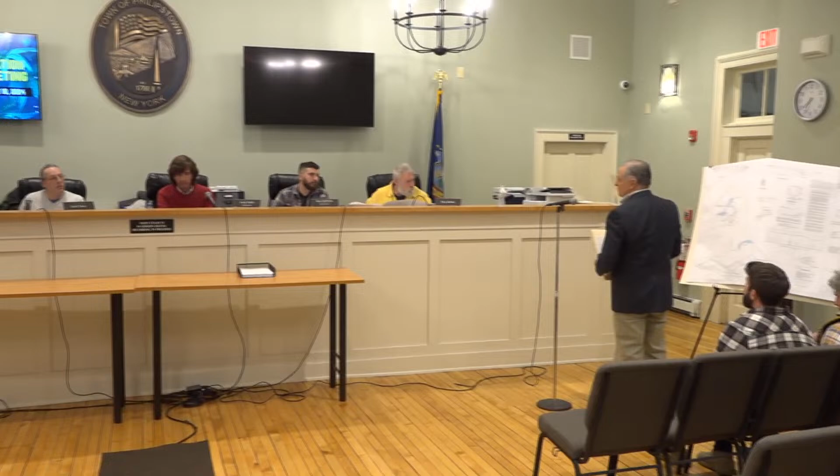Based upon the inspection made over the weekend with the board, we've prepared a revised plan for the board to review. We took the comments of the Conservation Board and made some environmental changes that we felt would ensure the preservation of the wetlands on the property and help preserve the character of the drainage channel.

So some of the changes made based on the board's input: we replaced a culvert pipe with a bottomless culvert, so that we're leaving the drainage channel intact and simply spanning over it. It's similar to a bridge, or an arch culvert without a bottom.

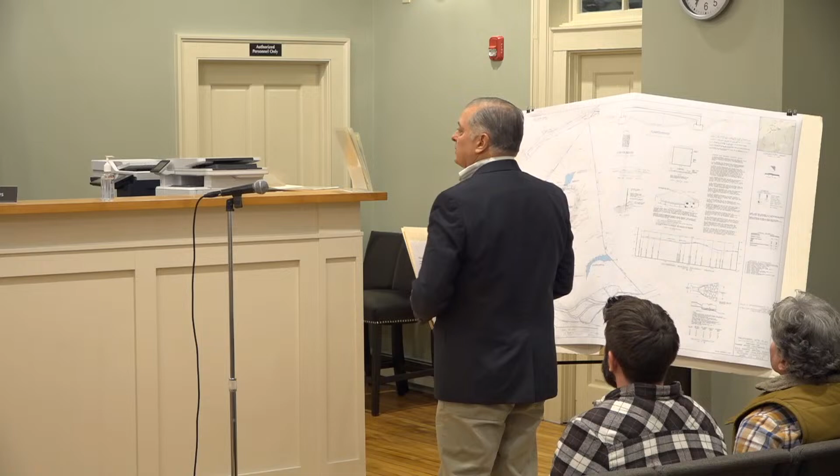In addition, we've incorporated stormwater management along the driveway. The intent is to intercept any runoff from the driveway prior to it flowing into the wetland, allowing it to filtrate into the ground. The proposed driveway will be a pervious gravel driveway, which will allow the stormwater to filtrate into the ground as opposed to shedding off the site. We believe those were the major concerns of the board based on our inspection.

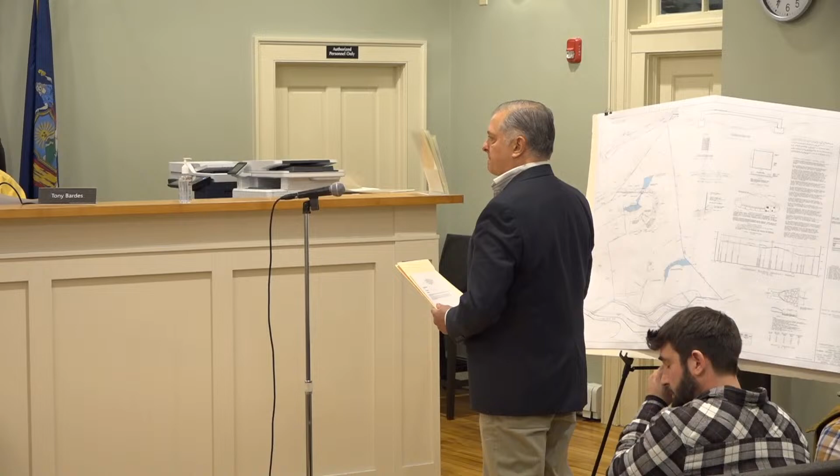So what you're using for drainage is basically a trench, a swale. We consider it an infiltration trench, and it allows the stormwater runoff to filtrate into the trench as opposed to flowing over land. Right, so my only comment on that - I'm not against it.

I've tried the same thing on my driveway, which is a half mile long, more for drainage purposes. The homeowners are going to realize the maintenance can be significant, because when you're plowing a dirt road, some of the material goes where the trench was. I'm not against it - I wish we had it on many of our unpaved roads in the town. If there's the wherewithal to take care of it, it definitely works.

Does anyone have questions or comments on this? How did you establish the width of the crossing? Just the span - based upon visual observation of the drainage channel, it appeared to be somewhere in the range of 6 to 8 feet at that point, so we increased it to 10 feet in order to ensure there's no impact on the water path.

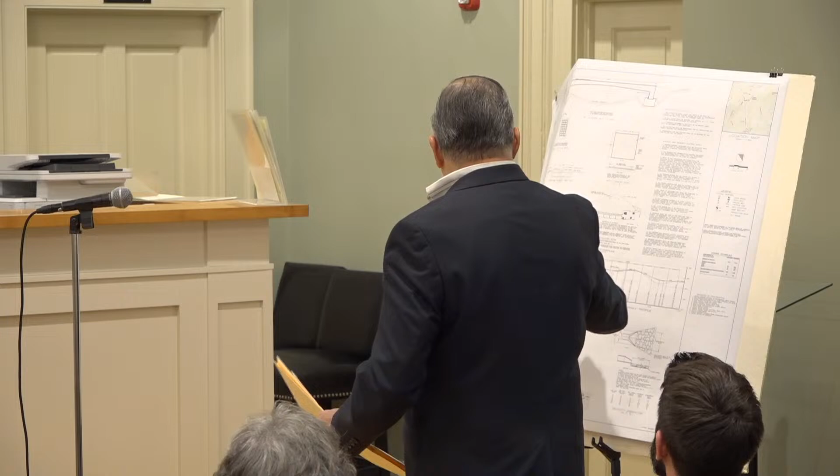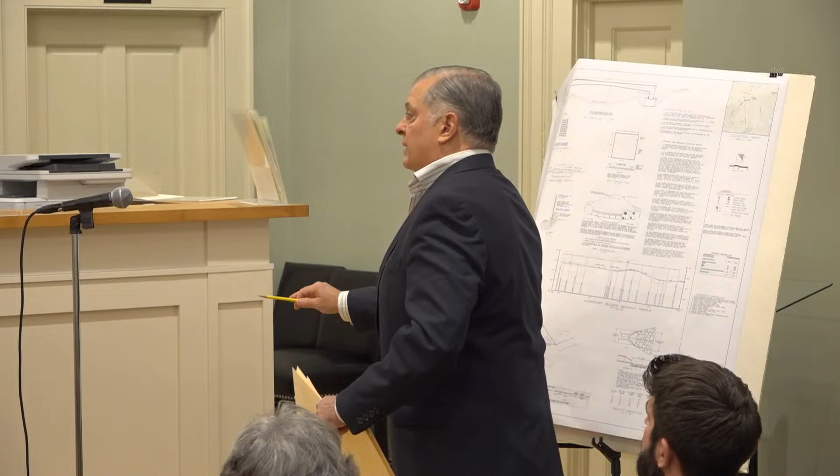So when you come off of Pine Ridge, there's a few feet of drop that would be graded to the level of the existing road. It comes back down to grade, and we're following the natural grade for most of the path.

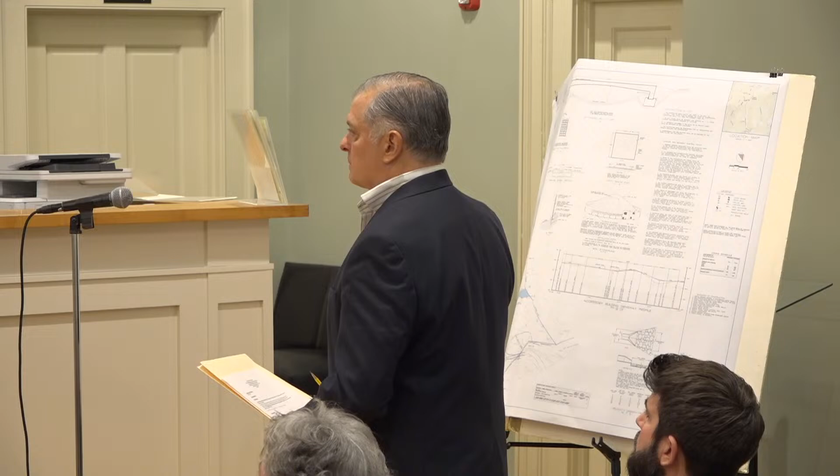I totally understand that. Where there's going to be some cut and fill is not in the to and fro, it's side to side. Because while you're on a gentle slope, the slope in spots is probably exceeding 5%, which just needs to be built up.

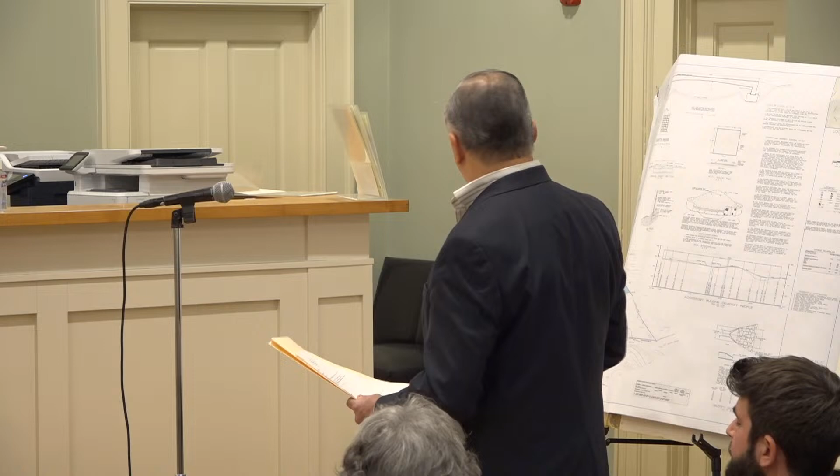So there may be some minor grading, but from my observation, we are able to create the proposed driveway with minimum disturbance to the existing trees, minimum disturbance to the existing grade, and it appears to be an ideal location for a driveway. But I do appreciate the input regarding the consideration of the drive.

We have other comments, questions? Yeah, I have one.

I was not able to make the site visit, and I was wondering if anyone would care to comment on the wetland area, the water body, and its health. I think at best it's an intermittent water course. It was dry. Well, everything's dry right now. I think it'd be hard to even classify what type of wetland it is, just based on the characteristics of the site right now.

So probably when it's really wet out and there's heavy rain, you're going to have water flowing through there, and the soil is probably pretty hydric, so it might pool in areas. But it's not a swamp or anything by any means, like a red maple swamp forest.

Well, the blue area looks confusing because it looks like a lake. Yeah, that's actually on a hill, a slope. It's not a lake.

I think using the floodplain, and using a wide span, as wide as possible, is a very good measure. We'll look into that. Protecting the bed and banks of the stream would be essential there, and working outside of that.

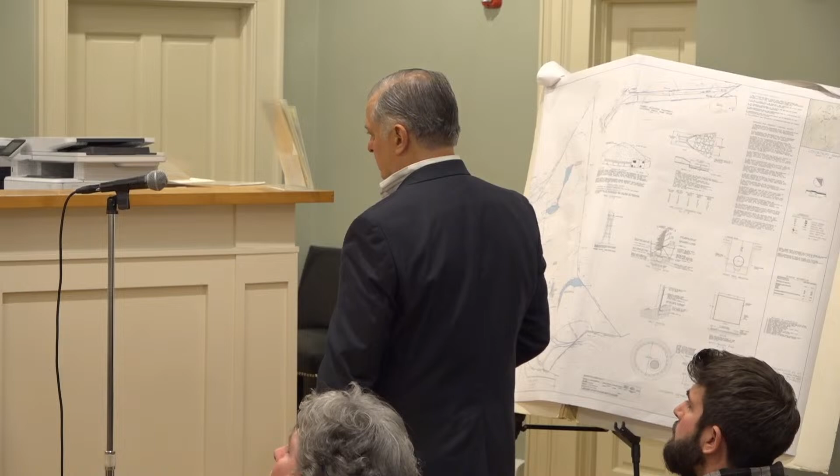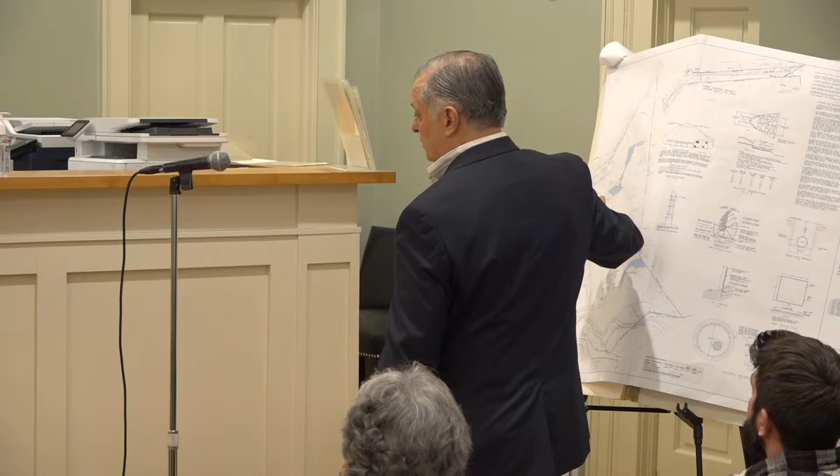That becomes an interesting one because they sort of overlap, the trench line. You're not going to dig the trench, I'm assuming, until you do the upper section. So I think the trench line, even though it's feeding the lower house, which we'll call Permit A, we'll probably have to permit with Permit B. We would need to be able to include the sanitary system for the existing house and allow that construction to take place if we were going to get a permit for the existing house. As far as the accessory, everything regarding the accessory could be left under that permit.

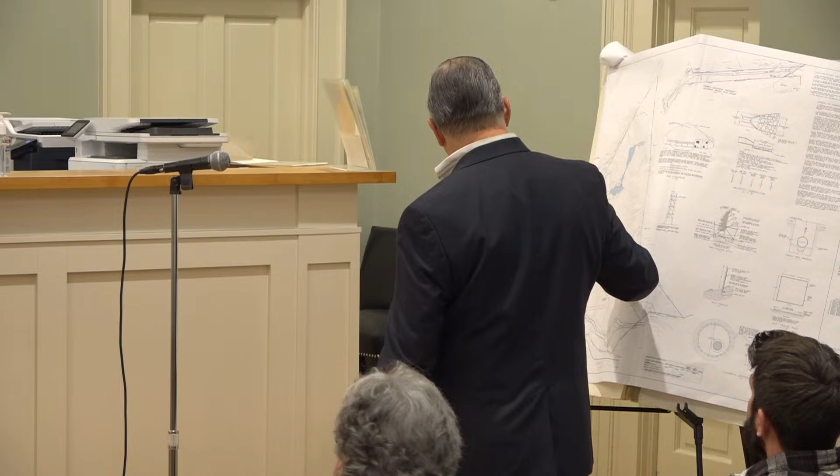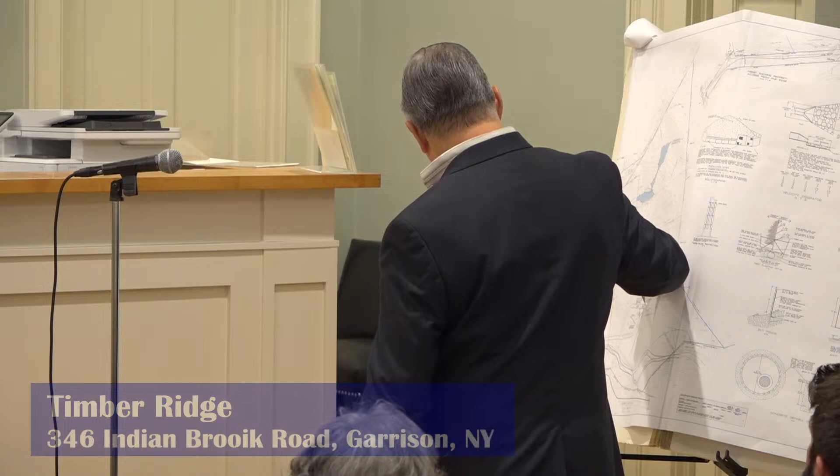So the existing house is reflected on the plan, it's shaded, and then there's a proposed addition that will sit right in front of the house, which was previously a stone and patio area. That will be replaced by an addition that comes out towards the driveway and extends to the right side of the house, basically below where the existing patio was located. So the entirety of the expansion of the house in terms of footprint is situated in the front and a bit to the right.

The other action would be the elimination of a septic tank, which sits just beyond the patio, and the abandonment of the existing septic. Then there are some accessory improvements - I believe they're redoing the patio on this side of the house, but primarily it's an addition towards the front of the house and then an expansion upwards. That's reflected on the plan here.

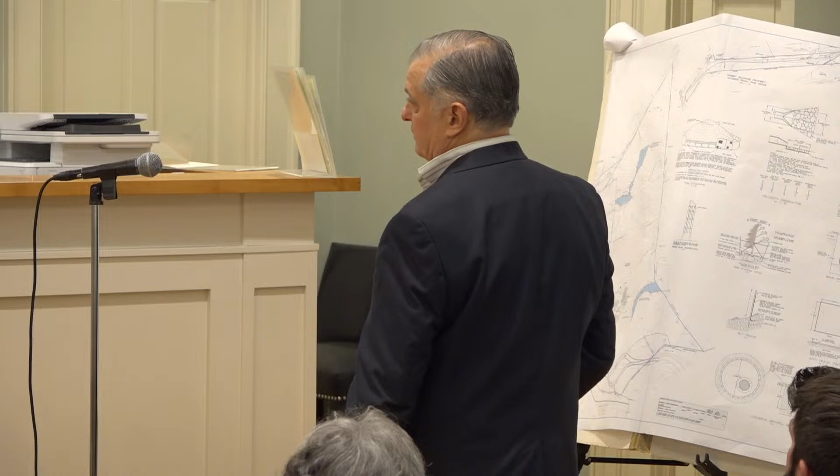The stormwater management is located in the front. We're providing subsurface discharge for the roof drains. And we are proposing the new well to be located just above the house and to the left, approximately 40 feet off the house. For the most part, that's the extent of activities.

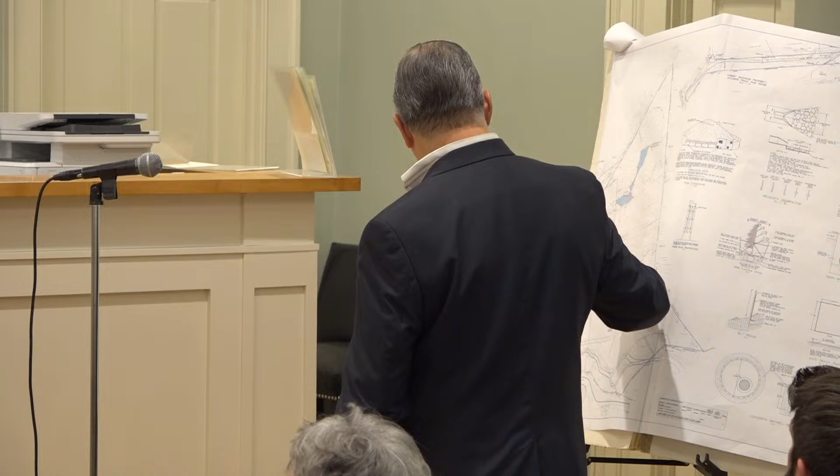The area within the wetland buffer would be a portion of the addition and the work to abandon the tank. Also, although there are two permits we're applying for, the trench - we're not going to dig it up a second time. The job is going to be done once, opened up, mechanicals put in, and we'll try to do them at the same time. So we don't want to separate it so much other than just the permitting factor.

So I think what makes the most sense is to have a consolidated plan. Come in next month with a consolidated plan - we've told you what's missing, what we want to see. Within that plan, it could be a big box showing Permit A or Project A, Project B. The one overlap is the trench, since the septic is outside of the wetland buffer. You're referring to the force main running from below to the top? Yep, that trench is solely for the use of the main house. It's completely independent - the accessory building does not have any activity disturbances, and there really isn't any connection between the two. So will the electric go up that way through the same trench?

The electric and the effluent pipe - from what he's suggesting, they may run the electric up the hill. I'm not sure what the separation is between the effluent and the electric, so that would determine how big that trench is gonna be. If it came from the main house, it would likely be an independent trench from the force main, the sanitary line, separated by 3 to 5 feet.